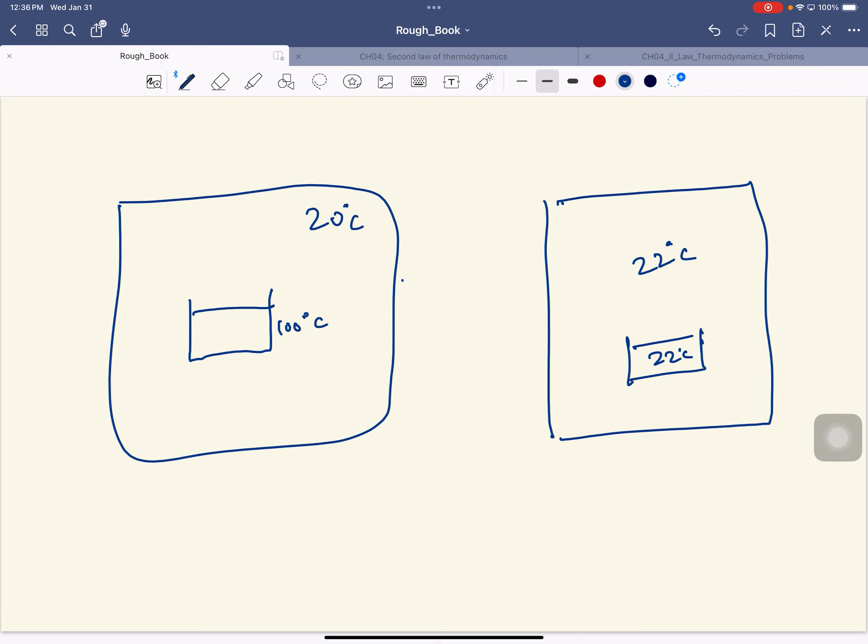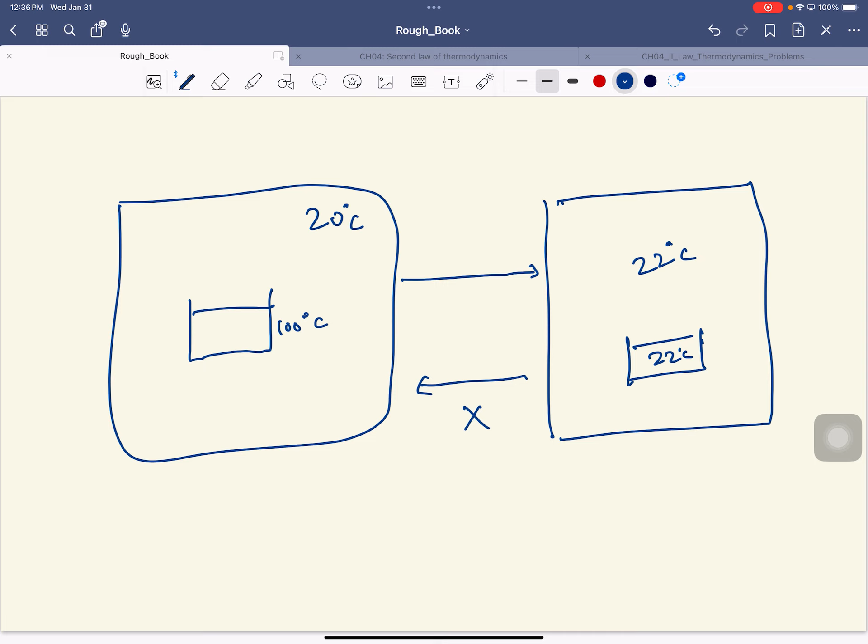This process occurs in nature, and this does not occur in nature. So in the top process, heat flows from here to there. And to go from here to there, heat would have to flow from there to here. See, in this process and this process, energy hasn't been created or destroyed. The first law allows that. The first law is cool with this process and that process.

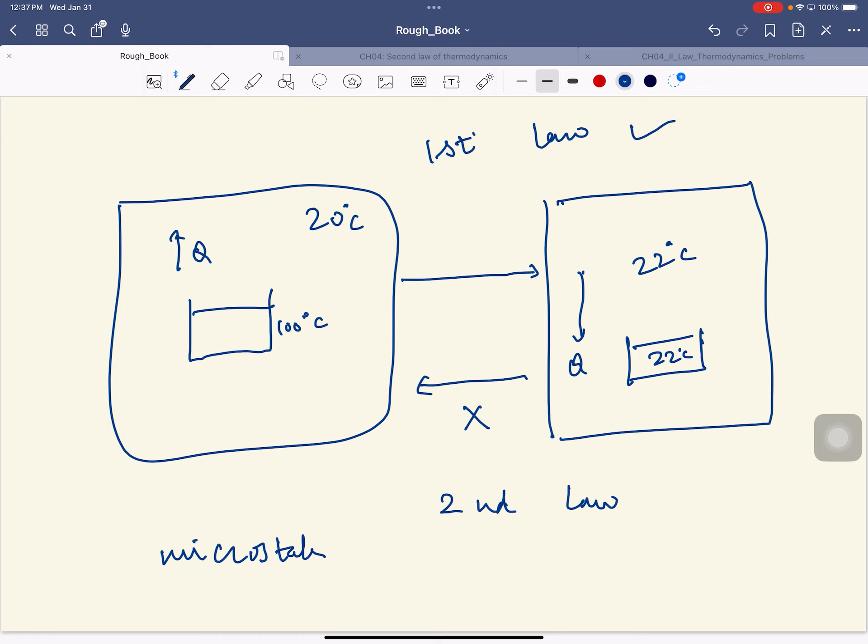But you never observed this in nature. So that's why you needed the second law. So the second law says this is not possible. And so that's why you need it. All right, we learned why this process doesn't happen. Why doesn't this process happen? We talked about something called microstates. And I will just give you the simple form of that.

So this state, let's say, has 10 to the power of 24 microstates. I'm just making up a number. That's a trillion trillion microstates. And this state has 10 to the 6 microstates. And the punchline is, in each microstate, the system spends 1 second, equal time. So you won't find the system here except for a very short time, and you'll find the system in this state most of the time. So the probability of being in this state is much higher than being in this state. So that's all you see. So even if you start off with this state, there are so many more microstates that the system will tend towards that.

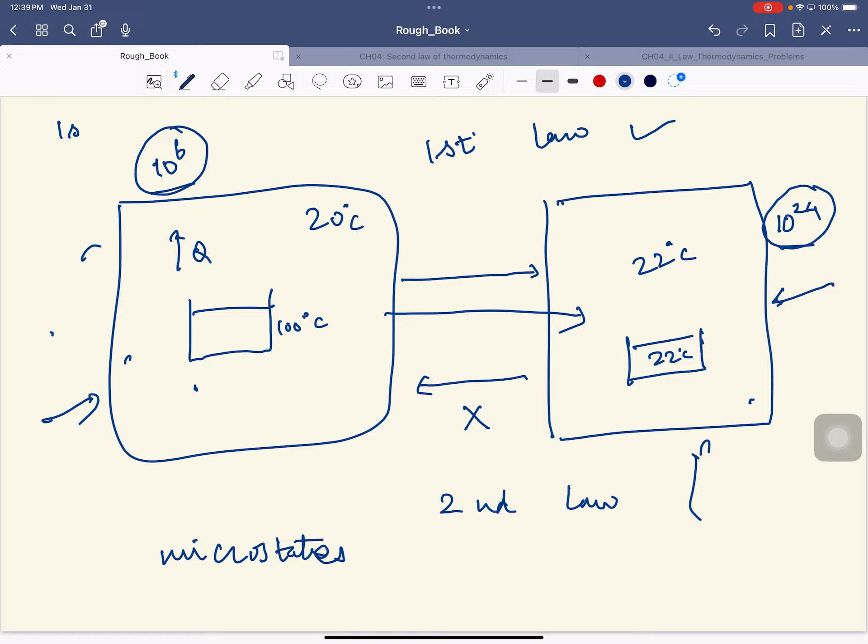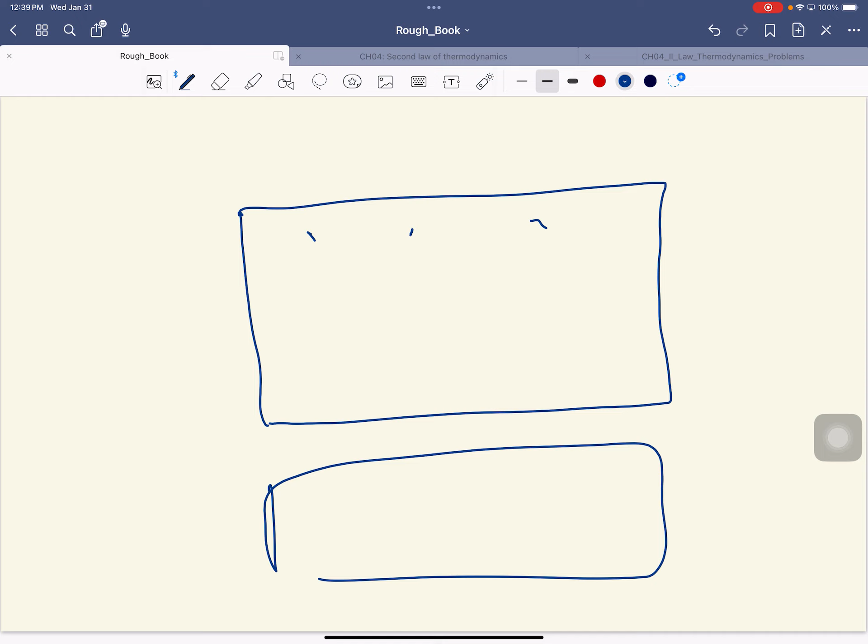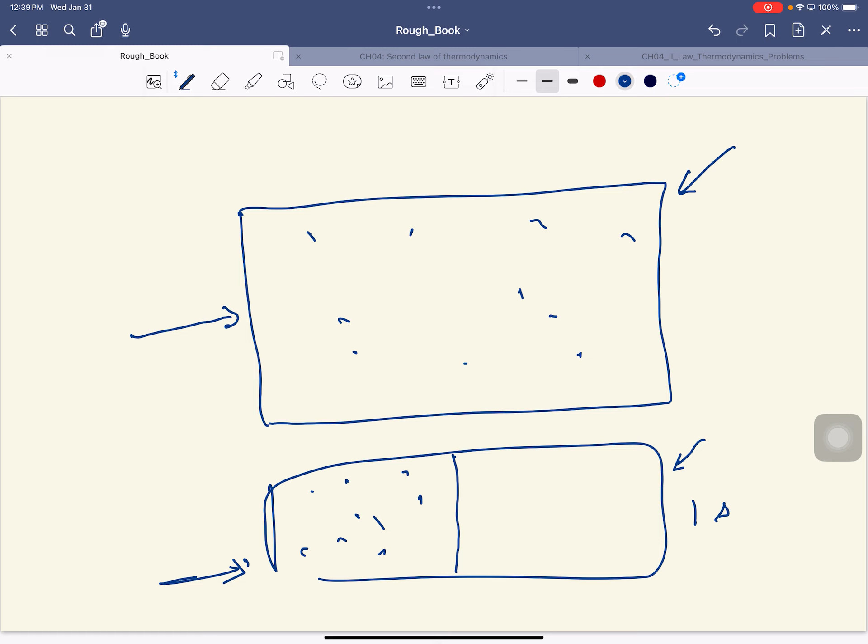So here's another very good example that you intuitively know. So here's this room. Right now the air is spread evenly in this room. Is it possible that all the air will get on that side of the room? Yes, it's possible. The number of microstates is very small. The number of microstates is very large. So the system mostly spends all its time here. It might spend 1 second, and I'll give you numbers for this, in a trillion years.

And so that's why you're never worried about all the air getting in there. So it's all a probability game. The chances of it happening are there, but they're just so small that you probably will never encounter it. Well, you'll definitely never encounter it in your life. That's the idea. Did you guys understand that? Okay.

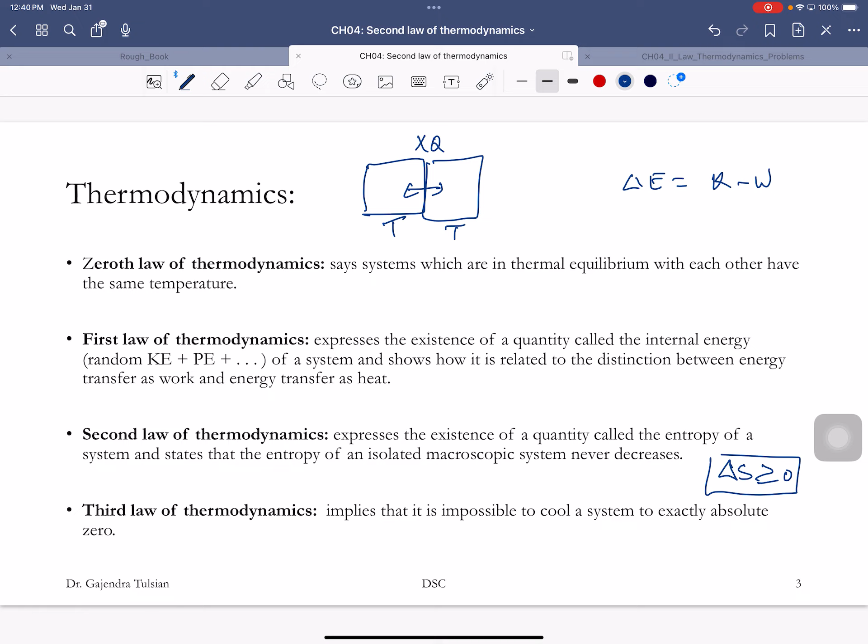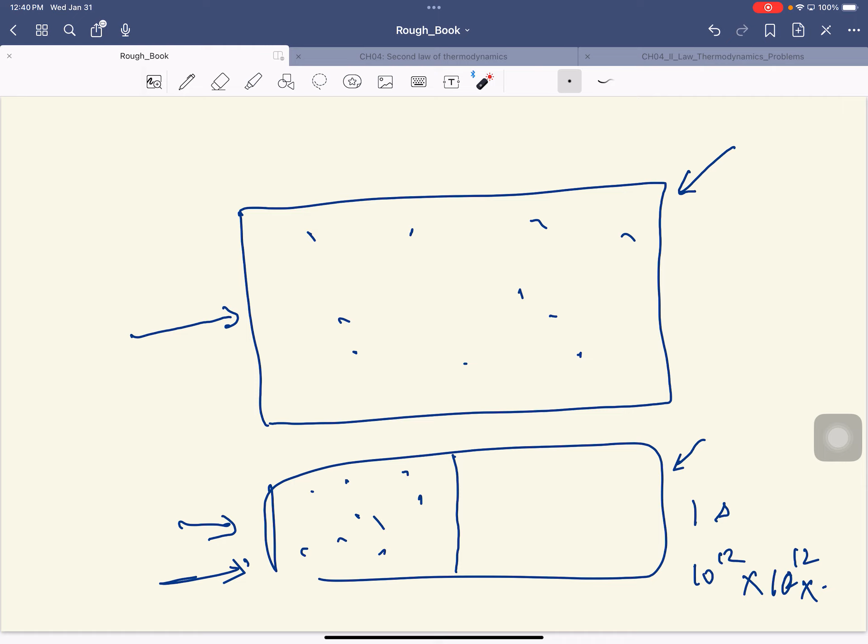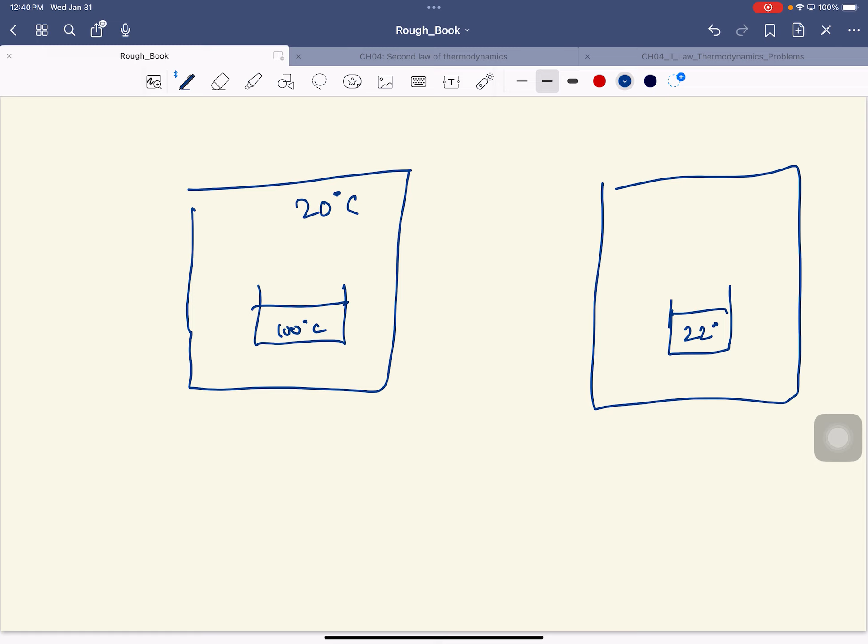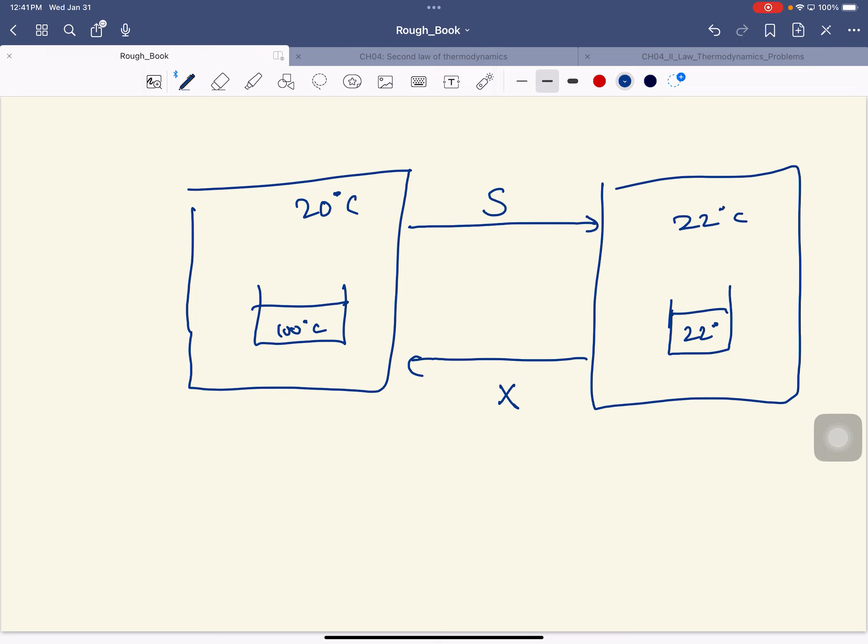All right, so we learned that entropy, so in this process, let me clean up the diagram. Going back to that example, here's the water at 100 degrees Celsius, room at 20 degrees Celsius, and this system will evolve toward that. This never happens. Why doesn't this happen? The second law introduced a quantity called entropy, and entropy increases in this direction, and entropy would decrease in this direction. And nature doesn't allow any processes where entropy decreases to happen.

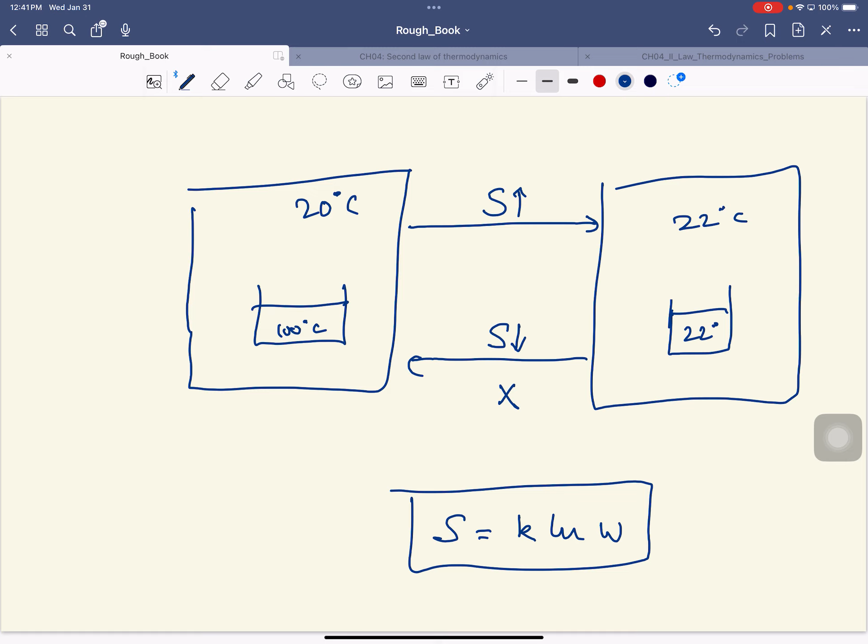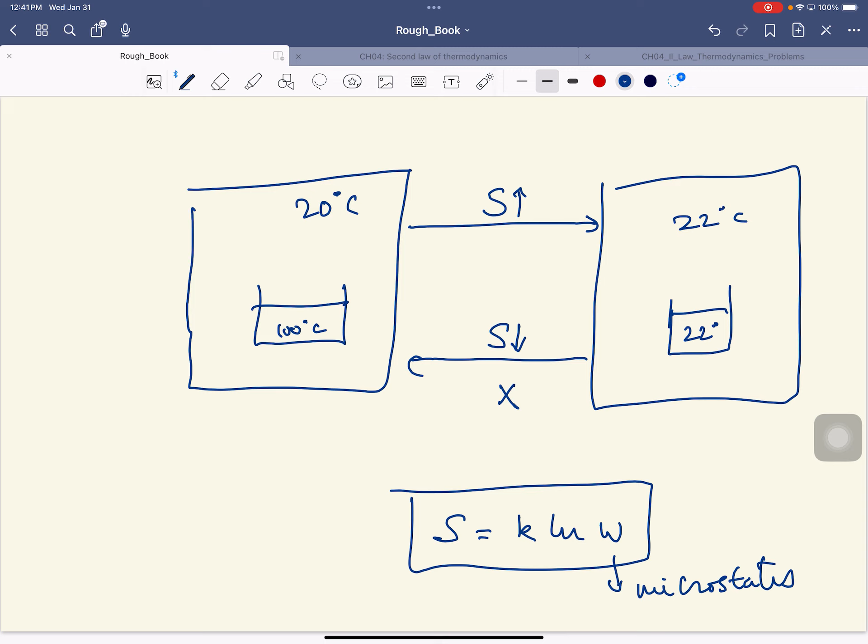All right. So entropy is k log W, if you want, that's the formula for entropy, where W is the number of microstates. And that's very hard to calculate, so in practice we'll never calculate that. W is very hard to calculate for systems. What is the k in that equation again? Boltzmann's constant. Yeah, and that was the formula Mr. Boltzmann came up with. Gotcha. Remember, Mr. Boltzmann was a pretty smart dude.

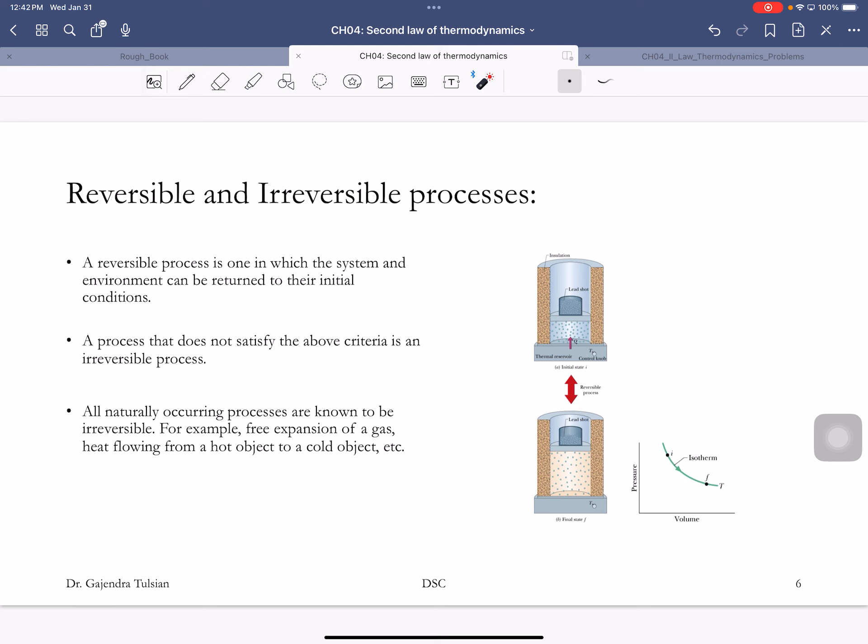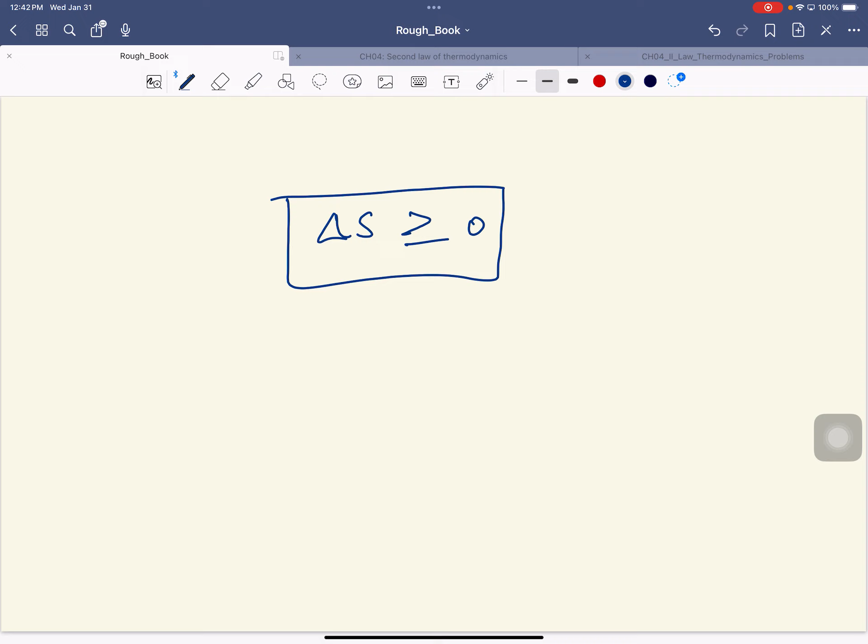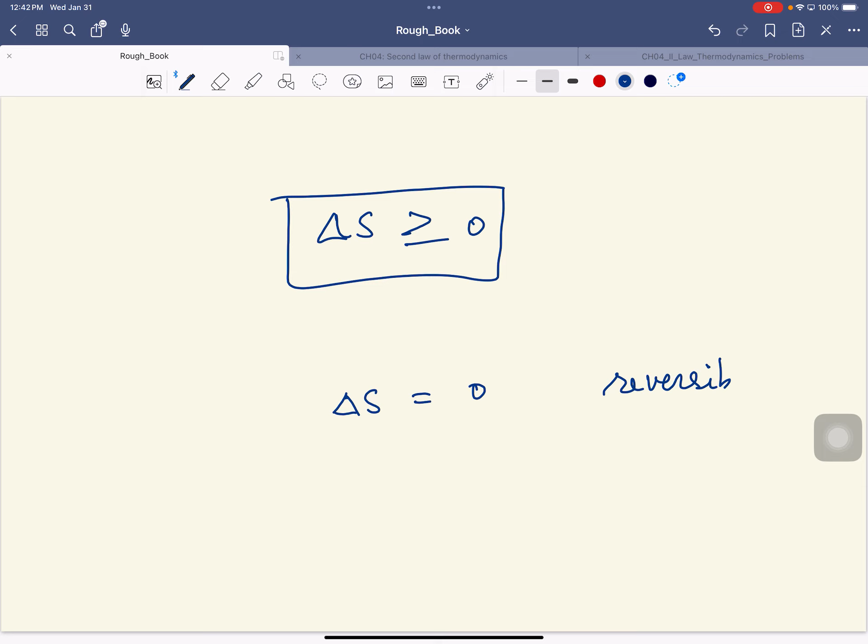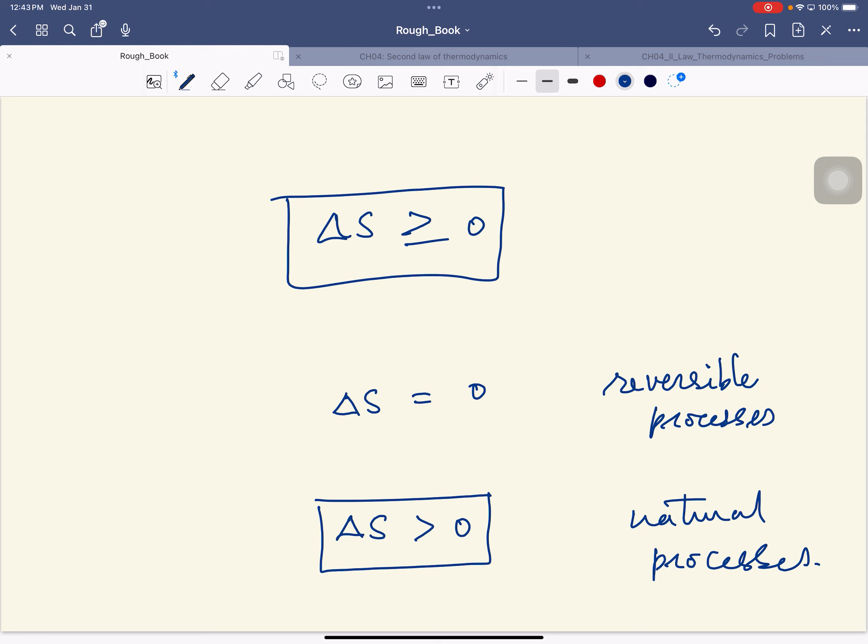So entropy is a measure of disorder in the system. It's a state function, and entropy always increases in all natural processes. We saw that this is the second law of thermodynamics. For an isolated system, entropy always increases. Change in entropy is greater than or equal to 0. When is this 0? Anybody remember? For reversible processes. Reversible processes are ideal processes, and in all natural processes, entropy increases. So in all the processes we see for an isolated system, entropy always increases. So we saw all of that.

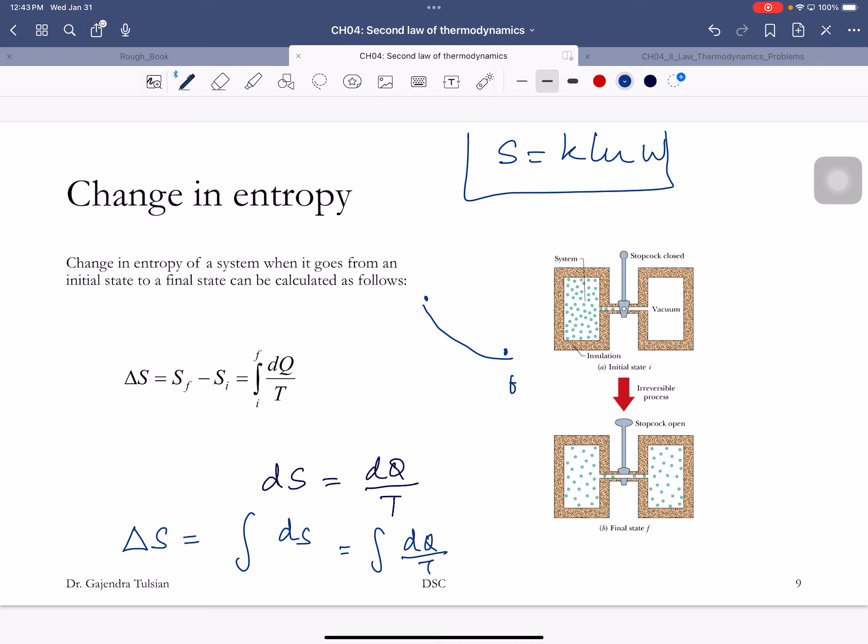So a practical way to calculate entropy. What we said was this is hard to calculate. This actually calculates the entropy for a given state, but it's hard to calculate because W is hard to calculate. So what do you do in practice? In practice, when a system goes from an initial to a final state, you can calculate the change in entropy. The change in entropy is the sum of infinitesimal changes for little steps. And what is that infinitesimal change? How much heat did you absorb at what temperature? And so you add all those numbers up and you get the change in entropy. And this is what's calculated in practice. Do you guys understand that? Okay.

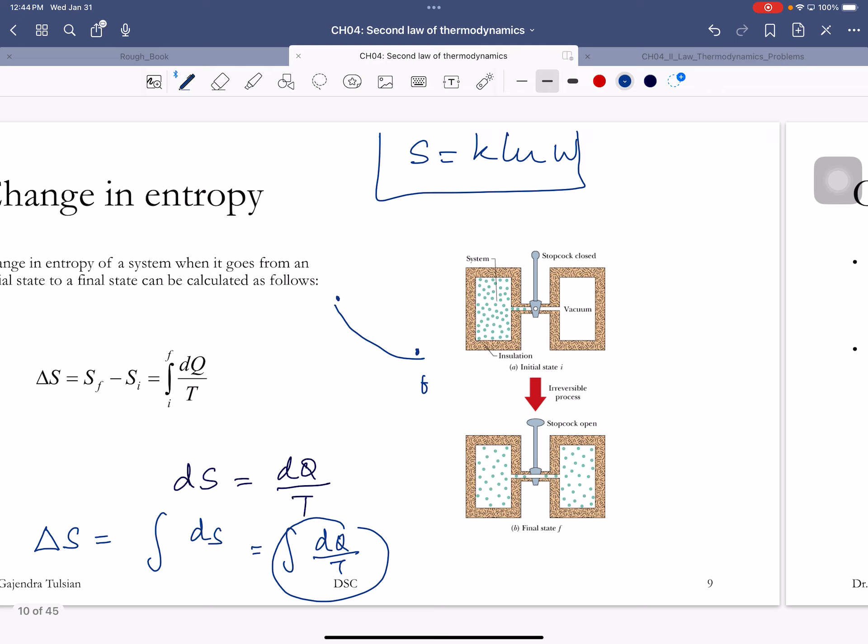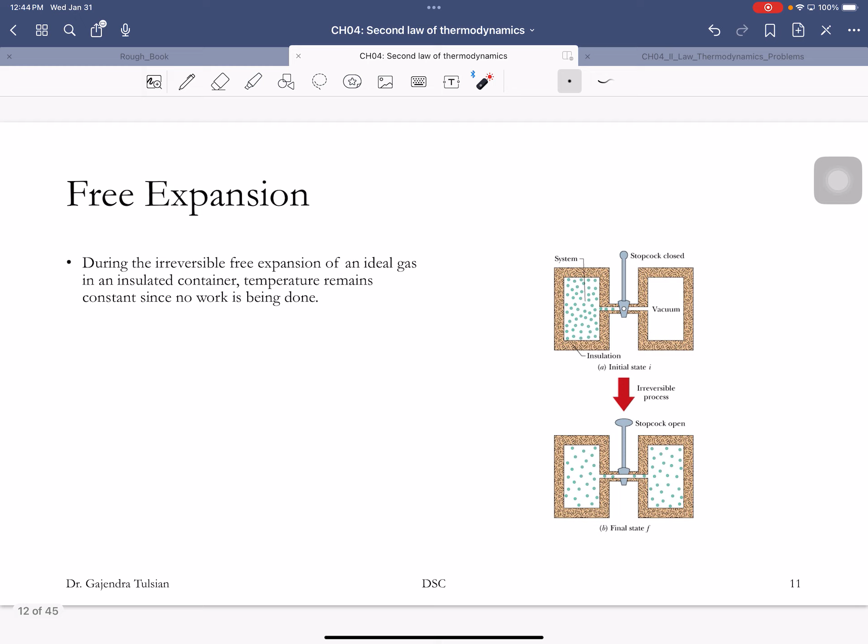Okay, so this is what's calculated in going from the initial state to the final state. All right, so we gave you this formula for if you're dealing with the ideal gas, and when it goes from an initial to a final state, and its temperature has changed by this much and volume changed by this much, there's the change in entropy. Okay? We would use that when we have an ideal gas, yep, and if you wanted to know the change in entropy. All right. So we saw all of that.

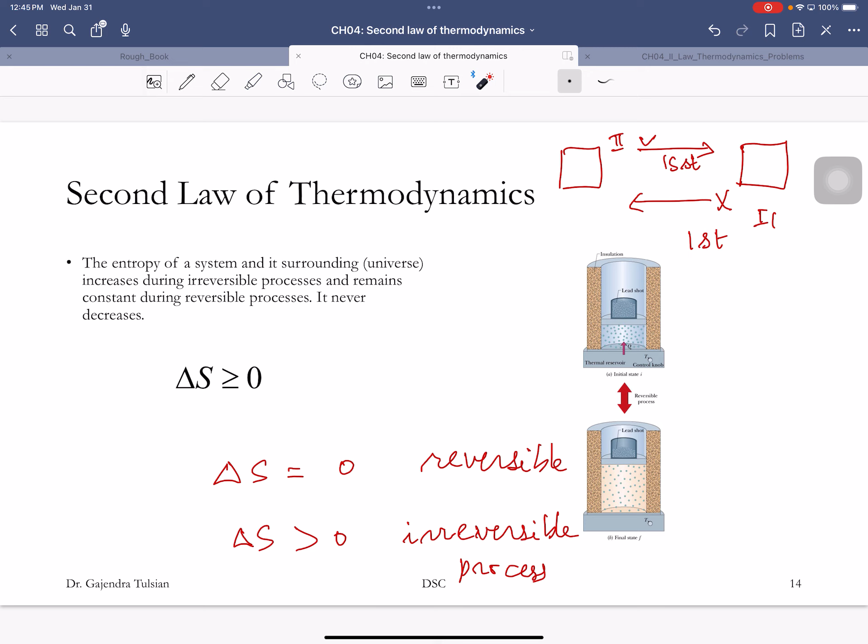For reversible processes, change in entropy is 0. For irreversible processes, change in entropy is greater than 0. And then we learned about heat engines. What do heat engines do? They use heat and convert some of that to mechanical work. Okay? So they get heat from a source, convert some of that to work, and the part that cannot be converted remains as heat, which you dump in a reservoir. Okay?

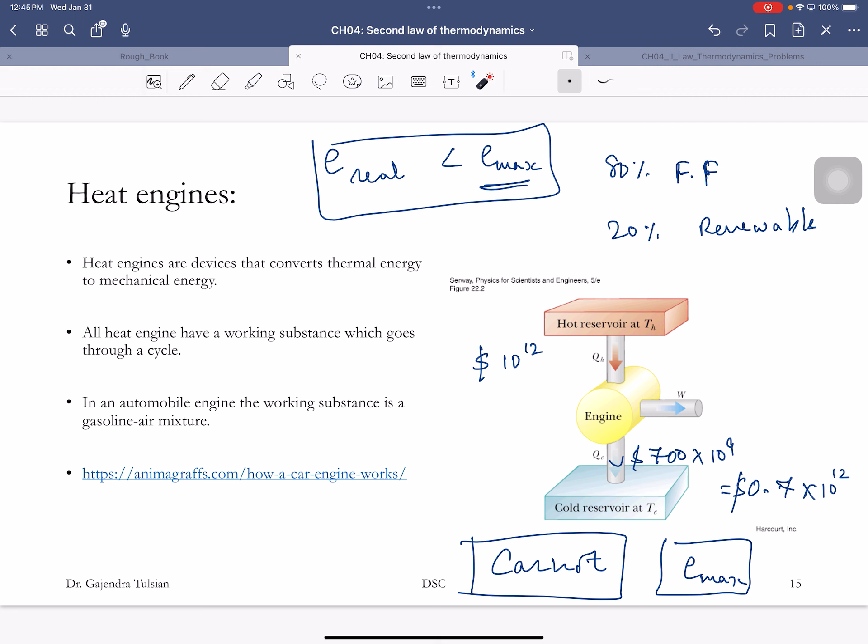Ideally, you would like to convert 100% of that heat to work, but of course that's not possible, and that's what the second law says. Okay? All right, so for a heat engine, we are interested in the efficiency of a heat engine. If you absorb this much heat, how much of it got converted to work and the rest got dumped. Okay, so this is the efficiency of a heat engine.

And you saw that in practice, your car is a heat engine, which is about 20 to 25% efficient. The best thermal power plants are coal power plants, which are about 35 to 40% efficient. Yeah, nuclear power plants are also about that efficient. The QH, that's the heat absorbed from the hot reservoir. Okay. So that's the heat released when you burn gasoline, for instance, in your car.

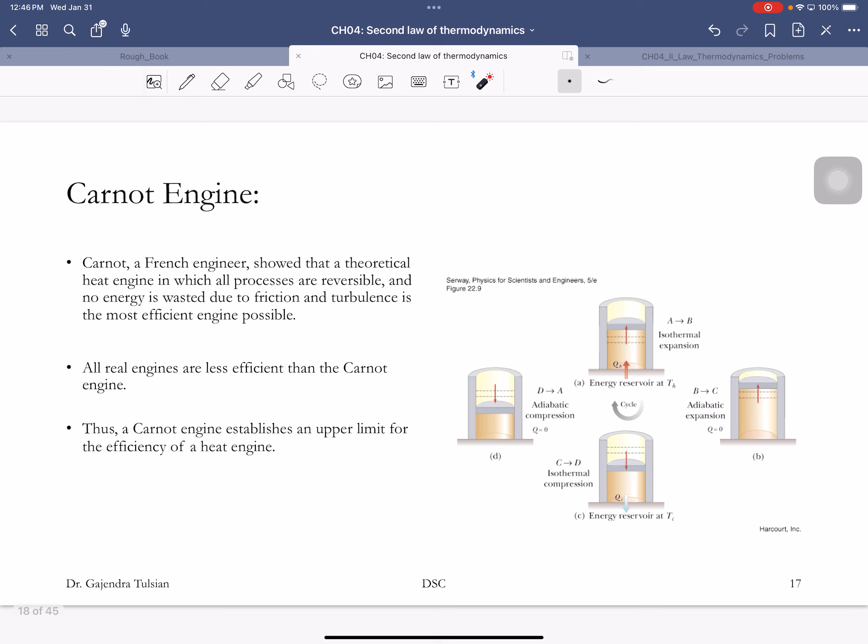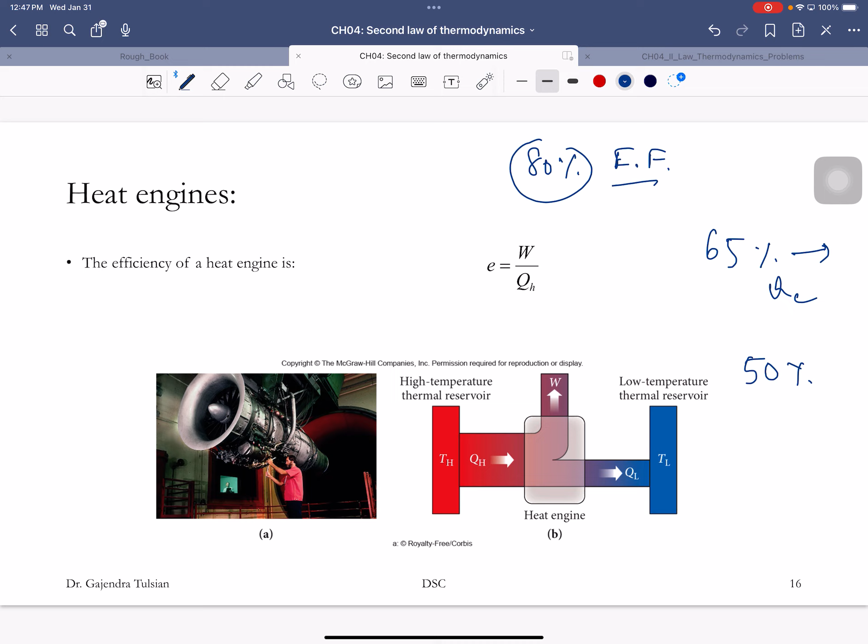Okay. So we use a lot of heat engines in our life. In fact, currently 80% of the world's energy is coming from fossil fuels. And what do you do with fossil fuels? You burn them, and so you're using them in heat engines. So 80% of your energy, and about 65% of this gets thrown out as QC. 65% of 80% is about half of your energy that gets thrown out the window. Okay. All right.

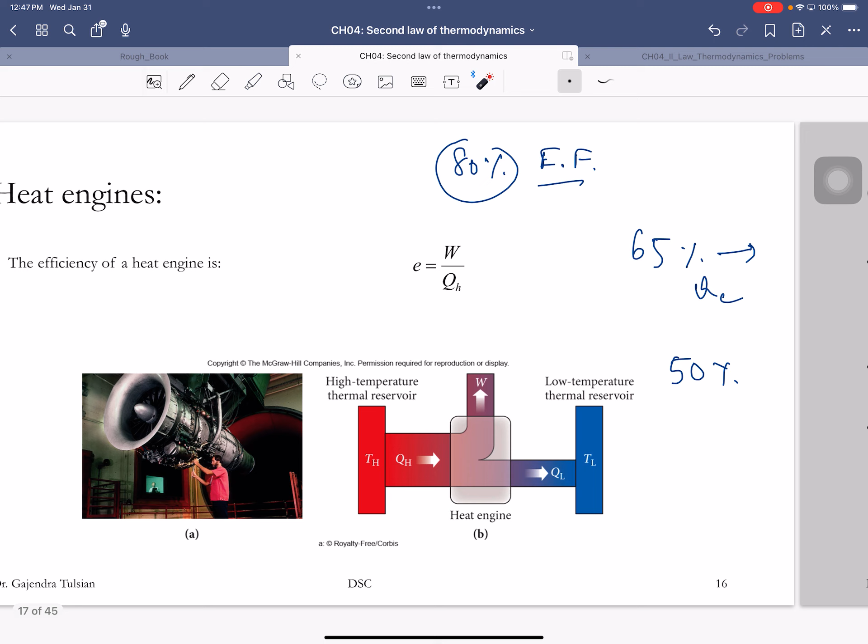So you want to maximize this efficiency, okay? And Mr. Carnot gave an upper limit for the efficiency of a heat engine. What Mr. Carnot found was the efficiency of a Carnot engine just depends on the operating temperatures. And all real heat engines operating between these temperatures have less efficiency. So this is the upper limit. And these temperatures are in what units? Kelvin.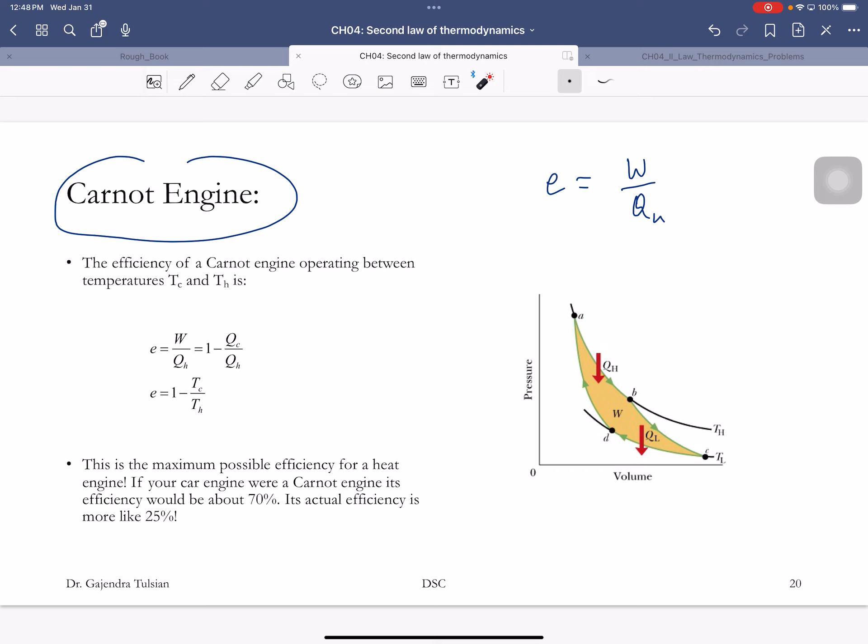Okay. So again, heat efficiency is W over QH. So you want efficiency to be 1. How can this efficiency be 1 if this is 0? So if your sink temperature is 0 Kelvin, and that's not possible, or if the temperature inside your cylinders is infinite, that's also not practical. So for those cases, you could have an efficiency of 1.

And then we learned about refrigerators. So what do refrigerators do? Here's a colder temperature, and here's a hotter temperature. They're removing heat from a colder temperature and dumping it in a hotter temperature. Nature won't do that. So that's what a refrigerator does. It removes heat from a colder region and dumps it in a hotter region. It's making heat flow uphill.

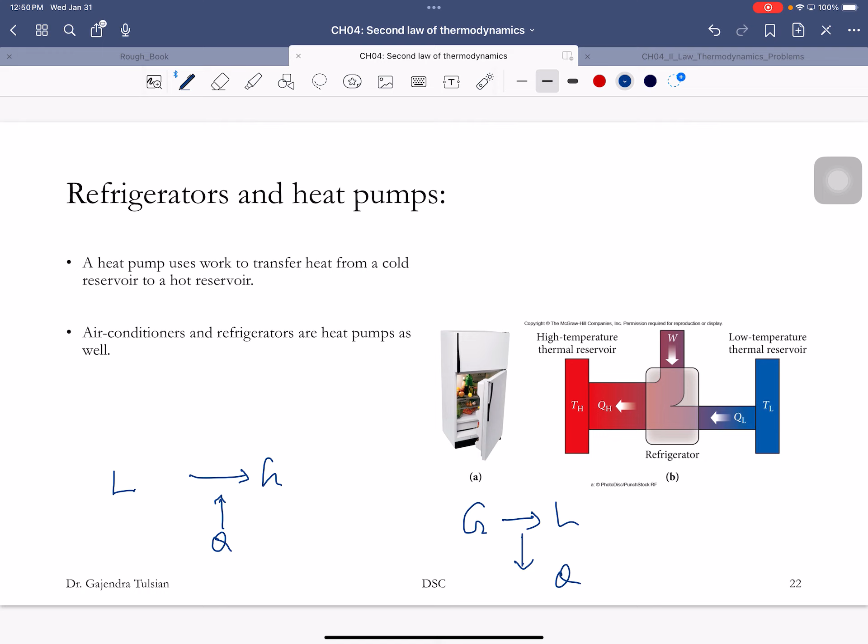How do you do that? You have to do work. You use a pump to do that. Okay? So it's making heat flow uphill. Well, how does it do that? A refrigerator uses the following idea. When you go from a liquid to a gas, you have to absorb heat. And when you go from gas to liquid, you have to dump heat. Right? All right, so let's see how this happens.

So here's a refrigerator. Inside the refrigerator, you have an evaporator with a coolant flowing. In the evaporator, you go from liquid to gas, and so you're absorbing heat. So you absorb heat at a region of lower temperature. And then you come outside. This is in the kitchen. Here's high pressure vapor, this is vapor gas, and you're going to convert it into liquid.

Outside, you're going to go from gas to liquid, and you're dumping the heat out here. Okay. Is it 65 calories or how much was it? For water, the latent heat was 540 calories per gram. But you're not using water here as the liquid, okay? So how many calories are you removing? Is it 540? No, if your coolant was water, you would remove that much, but your coolant is not. So how do you decide what your coolant is going to be? What is the liquid you're going to use?

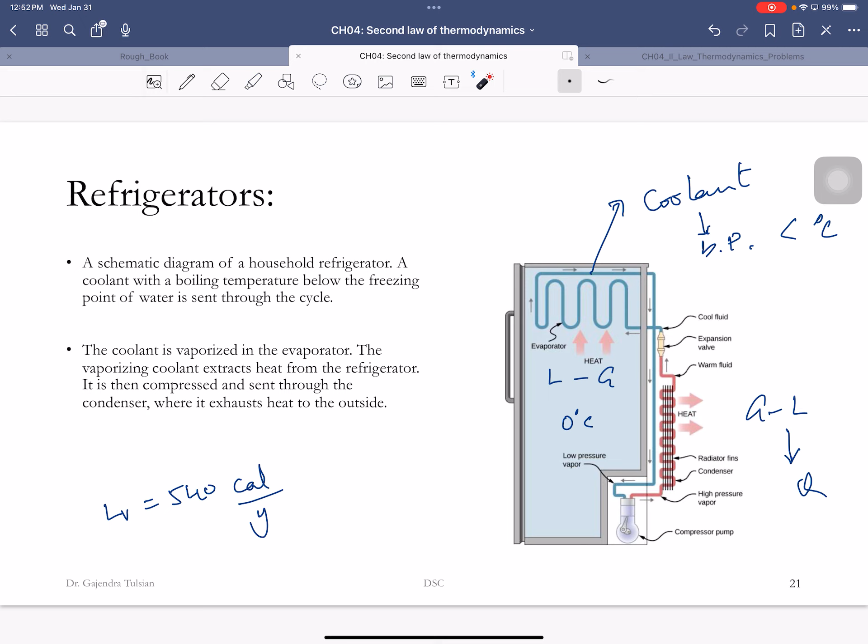Inside the refrigerator, if you want to maintain 0 degrees Celsius, you want the coolant's boiling point to be below 0 degrees Celsius. So that's what decides what coolant you use. Anyway, the idea is in the evaporator, the coolant turns from liquid to gas and it absorbs heat. And then when you come outside, you turn that gas to liquid and it gives up heat. So you're absorbing heat inside the refrigerator and dumping it in the kitchen. So that's the process.

The coefficient of performance: how good is your refrigerator? How much heat did you remove from inside the refrigerator, which is your goal, and how much work did you have to do for that? The refrigerator sitting in your kitchen has a COP of about 5. That means for removing 5 calories of heat, you had to do 1 calorie of work. So your water heater, your air conditioner, and your refrigerator are 3 of the biggest energy hogs in your house.

All right, now I'm going to quickly go over the rest of the slides. I won't go into the details; you can read it. Remember, entropy measures disorder, and we introduced this formula. What is K? Very good. Log W, what is W in there? The number of microstates. So for a given macrostate, for instance the gas in this room, what is the macrostate? Its pressure is 1 atmosphere, its temperature is 20 degrees Celsius, its volume is about 1,000 cubic meters. Those parameters tell you the state. For this state, how many microstates are there? That's a very hard calculation, and the number will be very, very large.

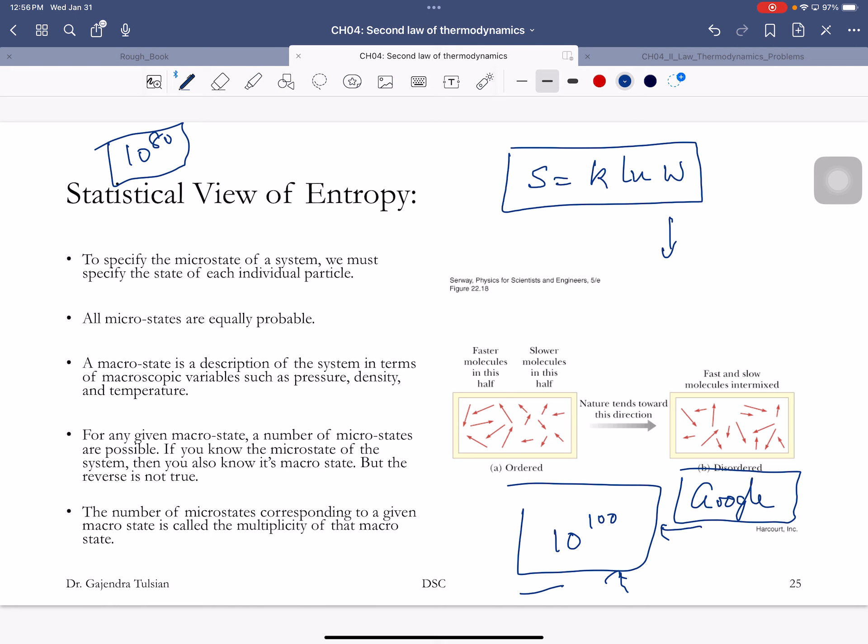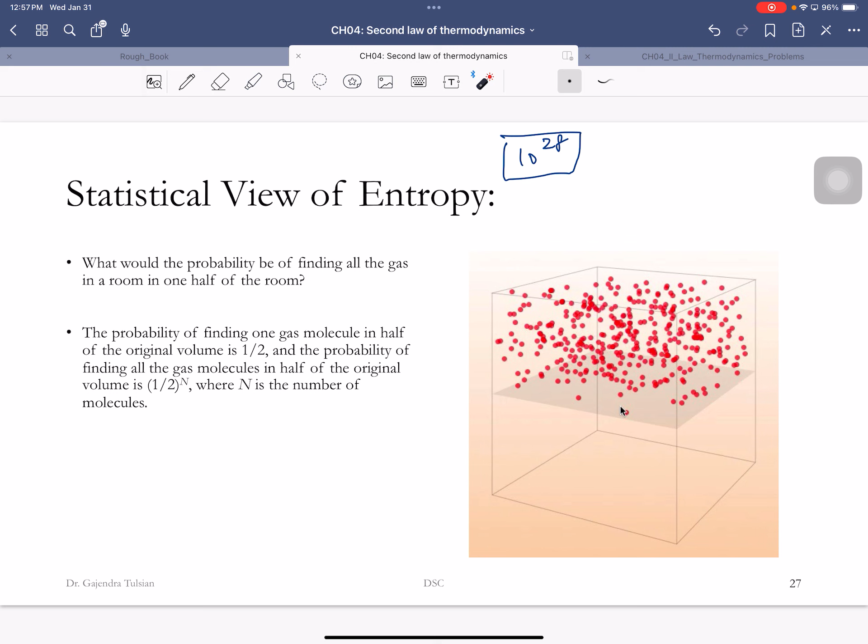All right, I'm going to show you some numbers. Anybody remember how many particles are in this room? Very good, 10 to the power of 28. The number of microstates for that many particles will be very, very large. So we're doing a calculation for a very simple problem. Let's say these are gas particles. What is the probability of a particle being here? It's 1/2, that's half the room. Let's say we have 100 particles. What is the probability of all the particles being in this half of the room? It's 1/2 to the power 100.

So for the particles to be evenly spread, the probability is close to 1, while the probability of all the particles being in this half of the room is that much. So what we are saying is, if the particles are evenly spread for 1 second, all the particles will be in this half of the room for only that many seconds.

That's what that means. Did you guys understand that? Or if the particles are evenly spread, okay, so this is what it translates to. If the system spends 1 second per microstate, this would take about 10 to the power 22 years. Okay, so I'll draw it. So what that statement is saying is the particles spread all evenly for 10 to the power of 22 years spent here, the system will spend 1 second there. So that's how many more microstates there are for this configuration than for this configuration. That's the statement.

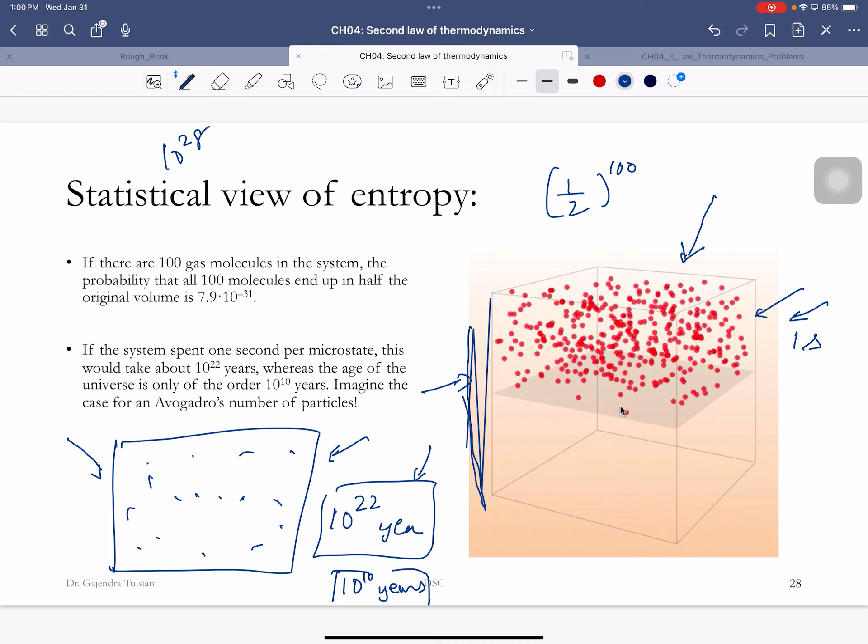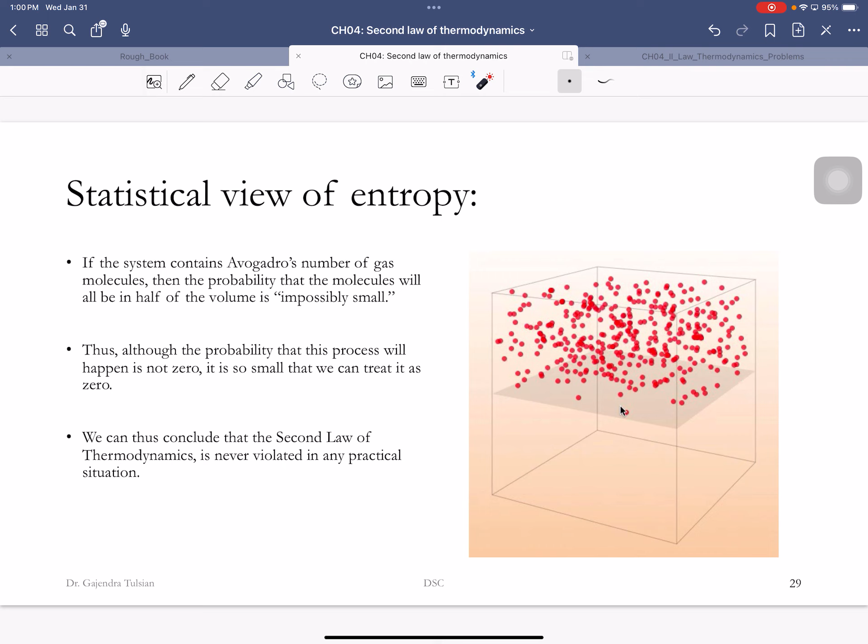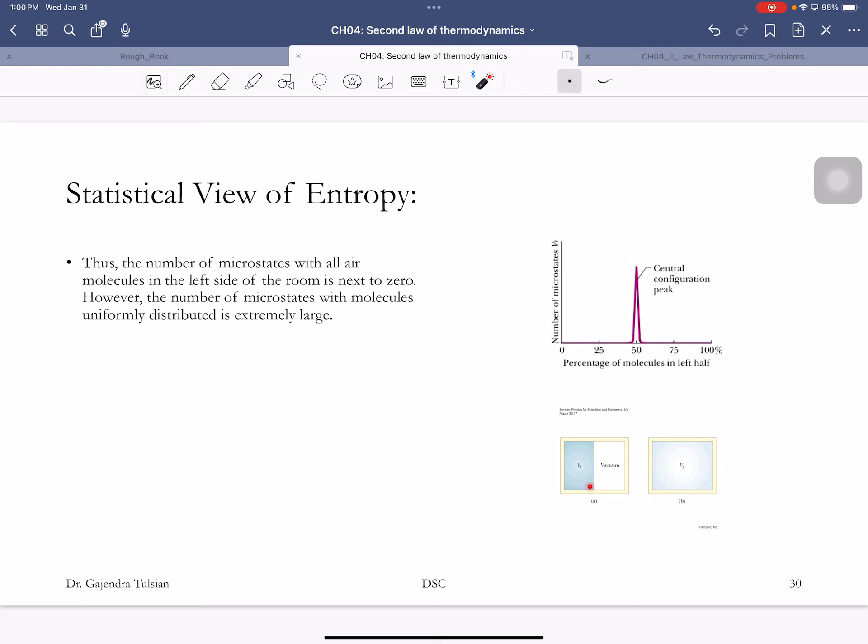And that's why for this many number of particles, you don't even have to worry about all the particles being on this side of the room. You know? And you knew that intuitively. Yeah. All right, so we can thus conclude that the second law of thermodynamics is never violated in any practical situation. Okay. So this graph shows you the number of microstates you have for evenly distributed particles. For this, the number of microstates is almost 0, so the probability is essentially 0 of being in that configuration. That's what this graph is telling you.

Okay. All right, so the slides go through the derivation of Boltzmann's law, briefly. And like I said, Mr. Boltzmann, an Einstein caliber scientist, was most proud of that formula. Again, the Boltzmann's constant, and that's the number of microstates for a given macrostate. So for instance, if you can calculate the number of microstates for a black hole, you can be friends with Mr. Stephen Hawking.

Okay. He did calculate it. No. All right.

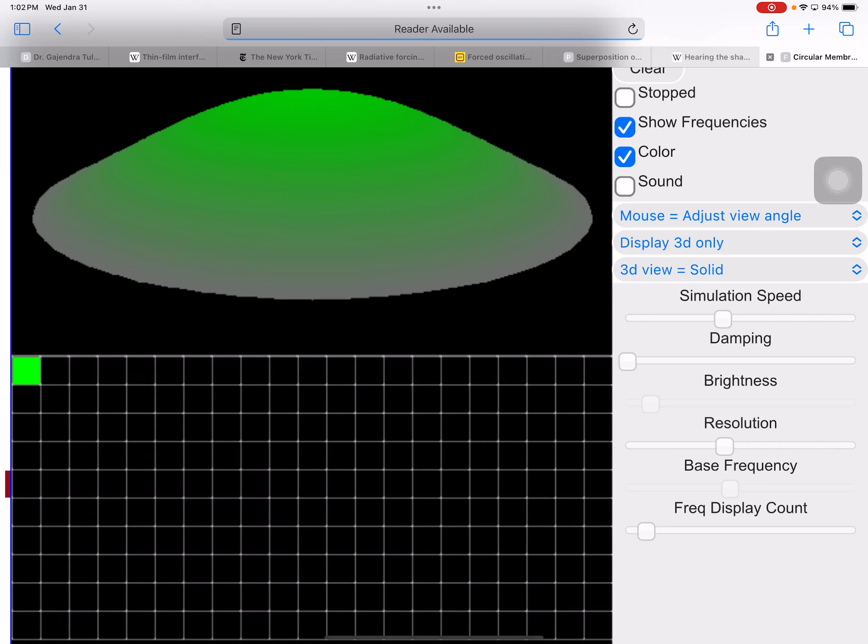Do you guys own a heat engine? Our vehicles? Yep, your cars are heat engines. Okay, so let's see how they work. What happened? Okay, there you go. All right, so what does a car engine do? It gets heat from burning gasoline and then converts that to work. Okay.

I'm Jake O'Neal, creator of Animagraphs, and this is how a car engine works. Let's start at a single piston, the powerhouse of the engine, and work our way outwards. The four-stroke cycle. When a piston travels to the end of its range, whether up or down, that's a stroke. Car engines use a four-stroke cycle, and it goes like this. First, intake. The piston descends, sucking an air-fuel mixture into the cylinder through the intake port, with both intake valves open.

Okay, so now you've taken an air-fuel mixture, and you're going to burn this fuel. The air is needed because when you burn, you're combining it with oxygen. That's when heat will be released.

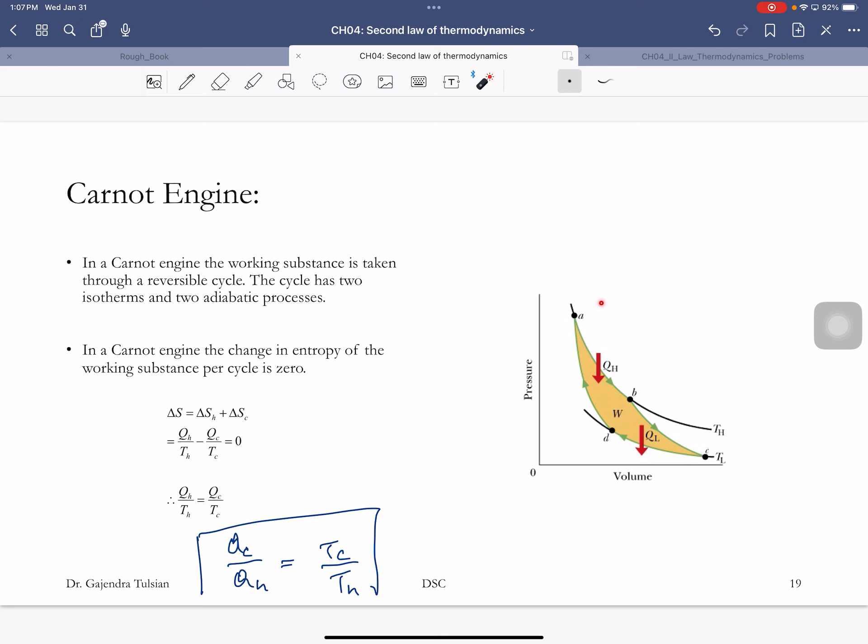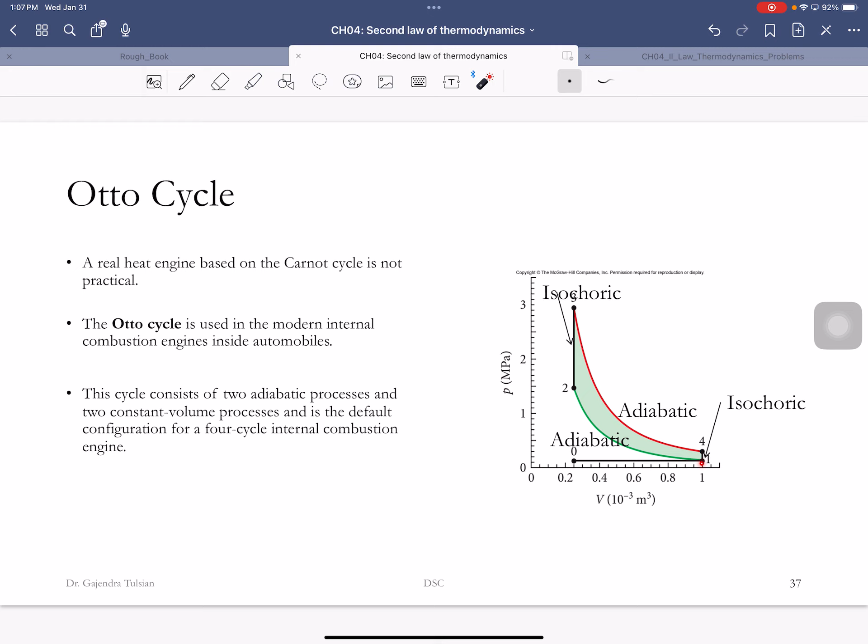Okay, so all engines operate in cycles. And the cycle was 2 isotherms and 2 adiabatic curves. But this is not practical. So this is idealized. It's a theoretical engine, and here is a practical engine. The Otto cycle is a practical engine. And here's the cycle it works on. So we'll go over these steps.

So intake stroke, you just saw that the intake stroke is when air fuel mixture is taken into the piston. Then what do you do once you take the intake? When you take air fuel mixture, then you compress it. Why are you compressing it? To make sure that all the fuel gets burned. You're prepping it. When you compress it, it's getting warm. You're compressing it just below its ignition point.

Now, the more you compress, the more likely it is that all of the fuel will burn. But one of the problems you run into is when you're compressing, if you try to compress too much, it might self-ignite. If it self-ignites, you're pushing and this heat is pushing you back, you're wasting energy. That is called knocking, which you might have heard of in cars. So pre-ignition is a problem in gasoline engines.

Diesel engines solve the problem like this. What they do is they just compress air. Air will not pre-ignite. Get the air nice and hot, and then you inject fuel, and it'll just explode. So that's how diesel engines solve that problem. So you'd like to compress the air fuel mixture as much as possible and get it as warm as possible. So in gasoline engine, that's limited.

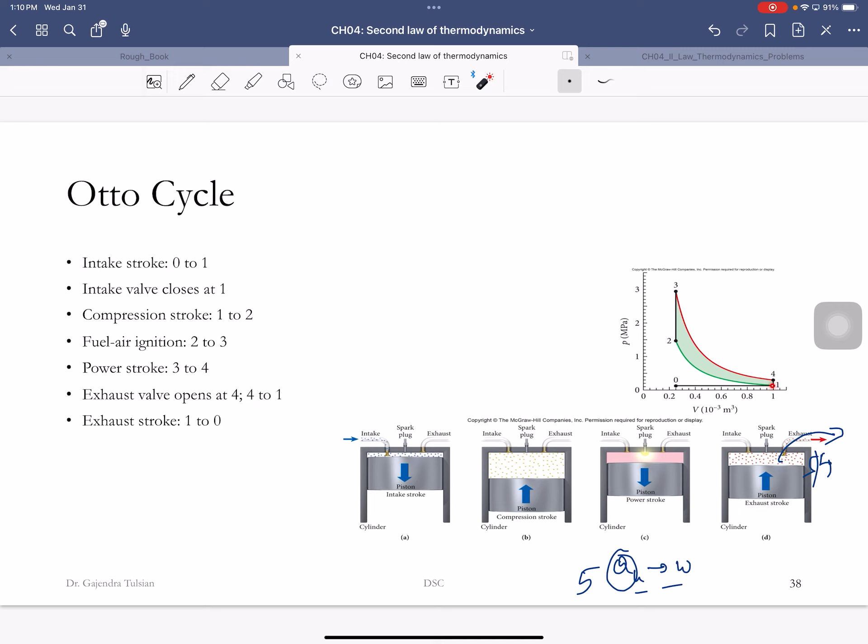So let me write this down. 1 minus R to the power of minus 0.4. That's what it works out to. 1 minus 1.4 is minus 0.4. What is R? So here you took in the air fuel mixture and then you compressed it. R was V2 divided by V1, or V1 divided by V2. What factor did you compress the gas by? That's R, from V1 to V2.

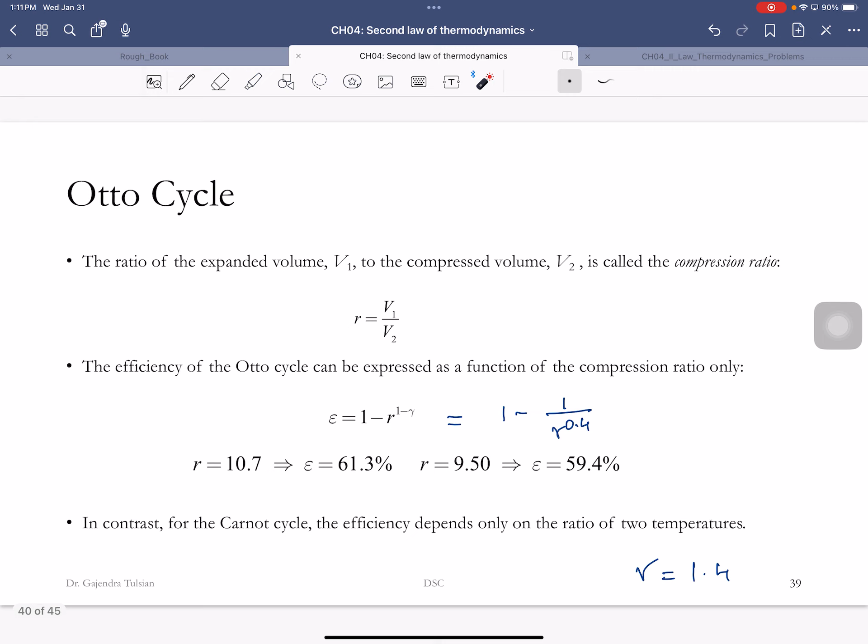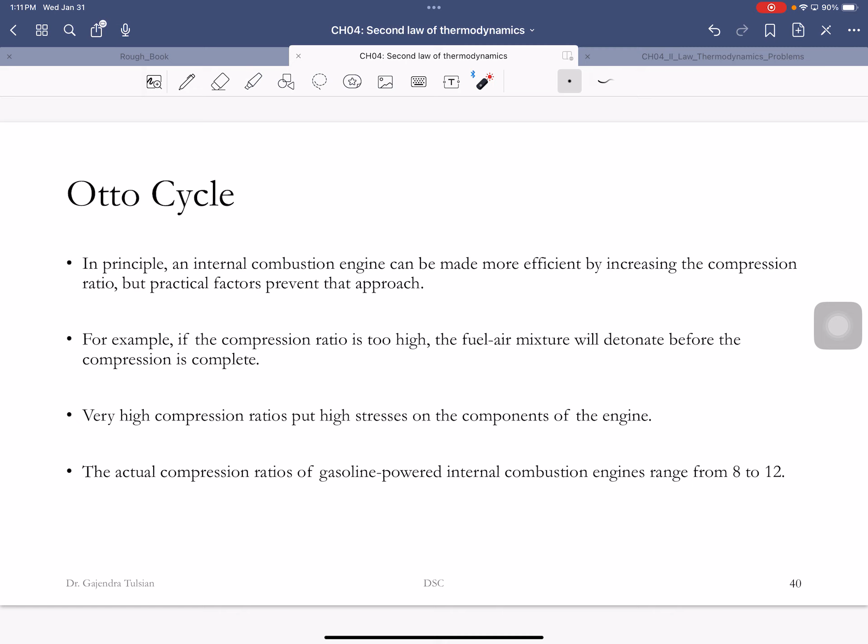Now notice, for the efficiency, you would like this to be 1, meaning you want this to be 0. So if the compression ratio were infinite, this would be 0. But remember, if the compression ratio is too high, you'll pre-ignite the air-fuel mixture. That's the problem. All right, so the efficiency of the Otto cycle can be expressed as that. If the compression ratio is too high, the fuel-air mixture will detonate before the compression is complete, and then you'll be wasting energy. Very high compression ratios also put stresses on the components of the heat engine.

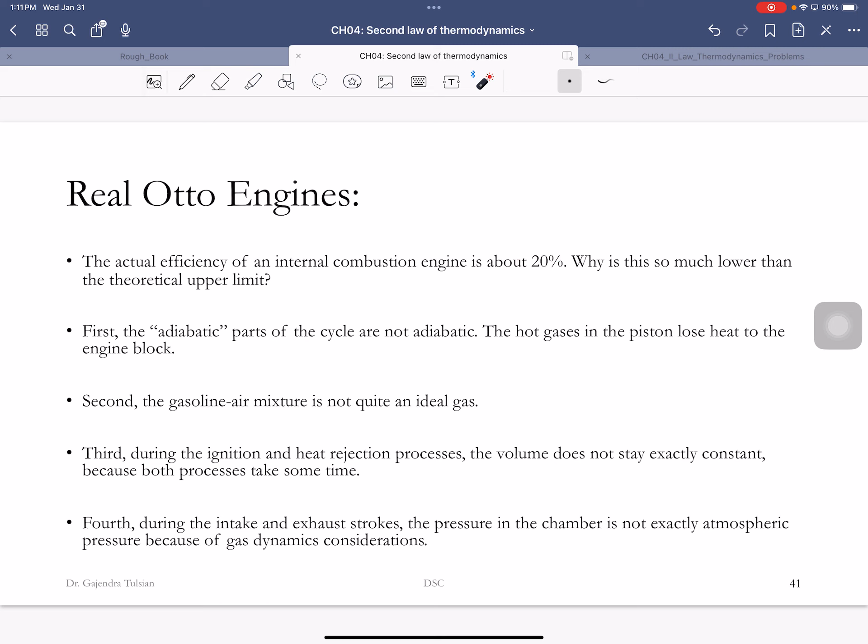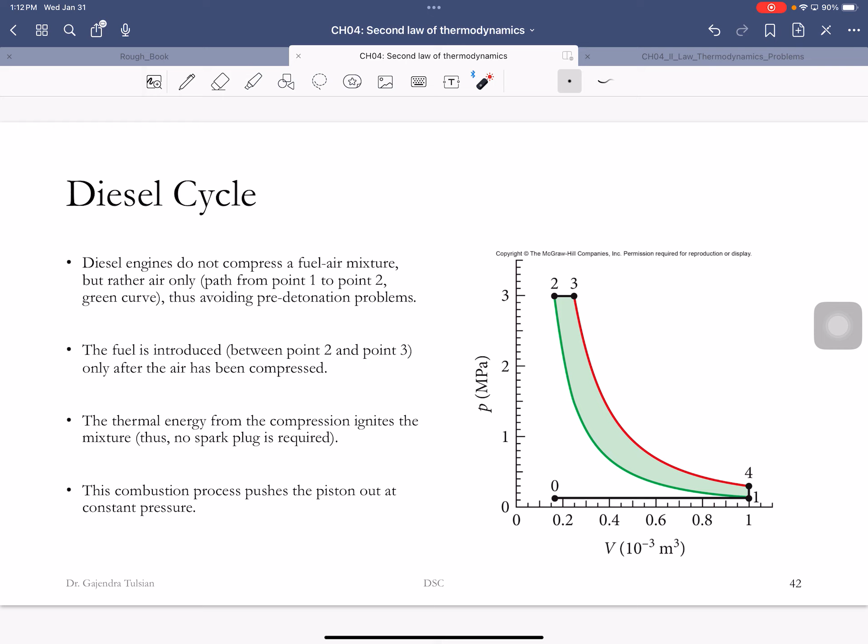So the actual efficiency of an internal combustion engine is about 20%. Diesel engines do not compress a fuel-air mixture, but rather air only. So now they can have a higher compression ratio, thus avoiding pre-detonation problems. And then the fuel is introduced only after the air has been compressed. And you don't need spark plugs either. So the hot air will ignite the diesel.